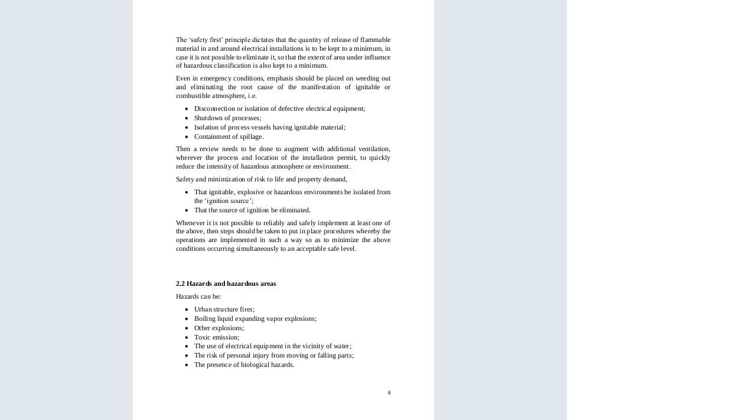So the notes are going on. I want us to go direct to the basic area classification. So how do I know that this is a hazardous area? How do I classify them? The area classifications cannot be set rigidly into any standard.

So each installation will be different in some respect, and therefore each site must be examined on its individual merits. There are three situations that can occur in an operating plant with reference to hazardous areas. Number one, a situation where an explosive atmosphere is present always or for long periods because of operational requirements, i.e. they are continuous. It can experience an explosion at any time, it's normally there.

Humphrey, are we together? Can you give me an example of an area that can easily be explosive, that maybe its operations always have a possibility of explosion?

Okay, areas like Mandera, Garissa. Why? Because of the Al-Shabaab attacks. No, we are not talking of the explosion from Al-Shabaab, we are talking about fire. We are doing hazardous areas.

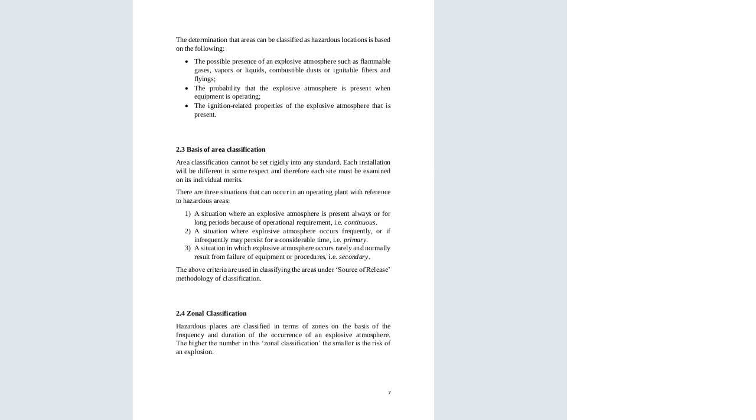So for hazardous classification, the above criteria is used to classify the areas under the source of release, that is the methodology of classification. For zonal classification, hazardous places are classified in terms of zones on the basis of the frequency and duration of the occurrence of an explosive atmosphere. So the higher the number of the zonal classification, the smaller the risk of an explosion. Let me take you to the next slide.

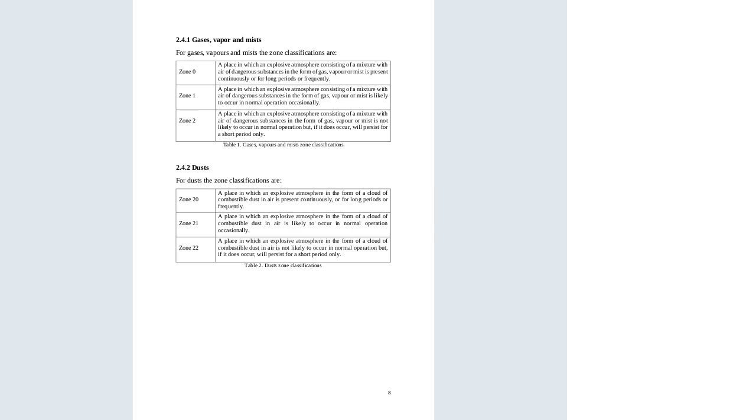Zone 22 is a place in which an explosive atmosphere in the form of cloud, combustible dust in air is not likely to occur in normal operation, but if it does occur, it will persist for a short period only.

Design philosophy of equipment and installation - I'll skip that since those are notes you'll read yourselves.

So, equipment definitions - the term equipment as defined refers to equipment we are going to use in installation in hazardous areas. We have special equipment used for installation in these areas; you cannot just do a normal installation there. That is why it's called special installation.

The equipment is normally classified by, number 1, the maximum spark energy it can produce, and number 2, the maximum surface temperature. For equipment to be considered safe for use on a plant, its classification category must be the same or better than that required by the plant. The statement of categories required on a plant, by its owner or user, provides any potential supplier or contractor with a clear understanding of the limits it must meet. So before any installation, you must know what kind of equipment you're using - if it can produce a spark, what is the maximum sparking it can produce, and how it will behave.

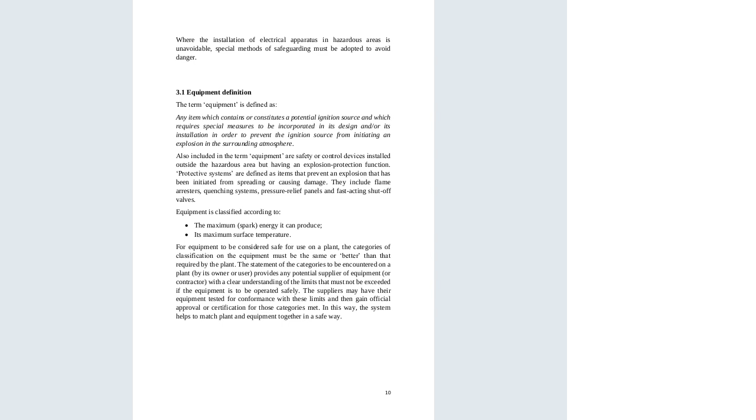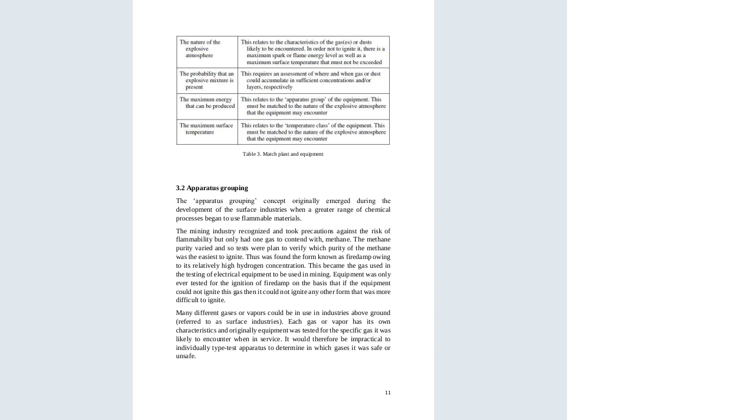So, the nature of explosiveness - you can see that table, you'll look at it later, I'll give you the notes. Apparatus grouping is also there.

Then the surface temperature classification. Ignition temperature, i.e. the temperature at which ignition could occur, for example due to a hot surface of the apparatus, is dependent on the type of gases or vapor present. This ignition temperature is influenced by several factors and is thus dependent on the stipulated testing.

The maximum temperature of an exposed surface of an electrical apparatus must always be lower than the ignition temperature. That is why, before doing any installation in these special areas, you have to test the ignition temperature. You must know the maximum ignition temperature present in the dust, gas, or vapor in that area, and ensure the electrical apparatus used has a temperature lower than that ignition temperature.

For example, maybe you're using a tester to check continuity of a circuit, and the tester has been removed from a hot environment. The temperature of that tester could ignite the environment, maybe the gas present. So you have to be very careful and test, which is why we are told to take a lot of precaution when doing testing.

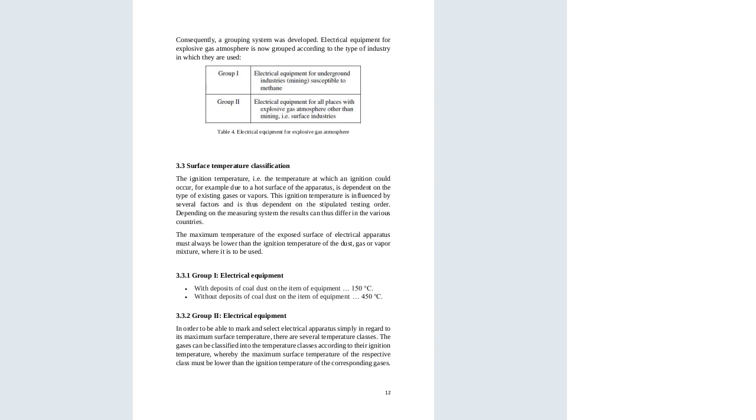Now we proceed to group 2. We said group 1 equipment are equipment with deposits of coal dust on the item, equipment that is below that degree rating. Now without deposit of coal it has to have that degree rating. So you will read those. I want to take you to something, I want to give you something.

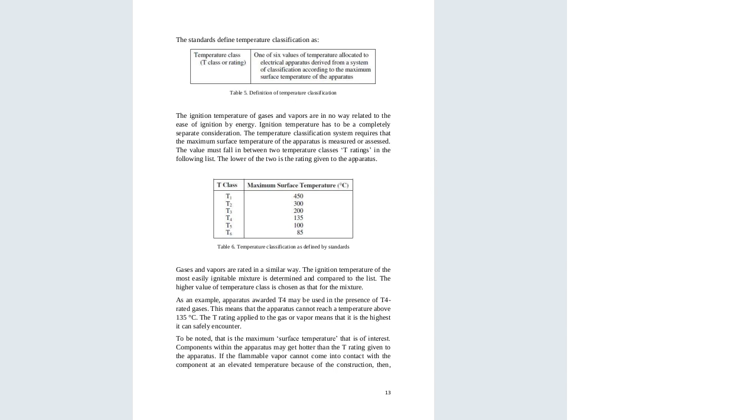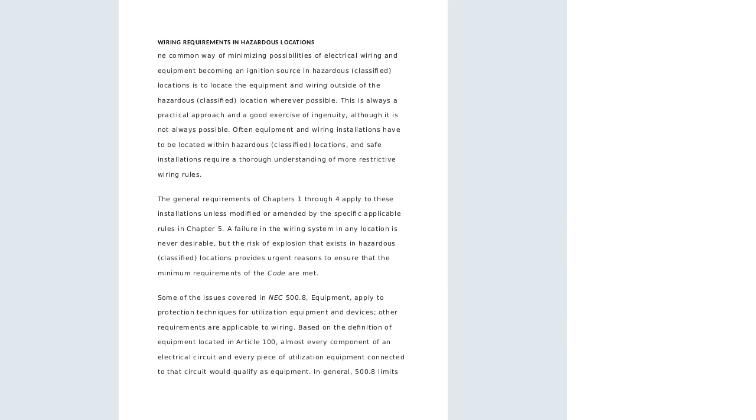Now, wiring requirements in hazardous locations. After being able to identify the classes or areas, we have been able to classify them, so we are going to look at the wiring requirements.

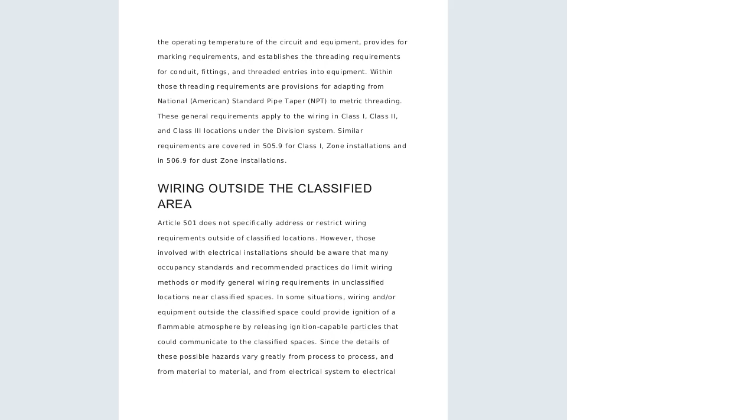Zone 1, Zone 2, that is class 1, class 2, class 3. We said zones can be classified as classes. We can have class 1, which is zone 0, class 2, and wiring outside the classified areas.

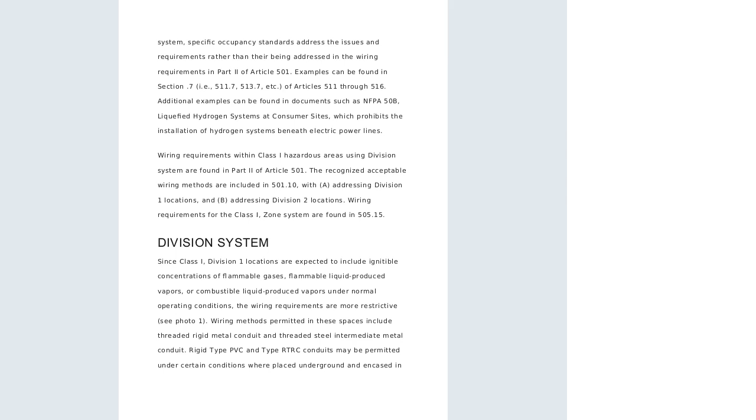Don't know why my notes are not coming. Okay. Division system. I'll give you those notes, I'm looking for something so that I can explain.

Methods for classification, divisions, and locations. So rigid metal conduit, intermediate metal conduit. Wiring methods permitted for Class 1, Division 1 locations are identified in the section covered earlier, and include threaded rigid metal conduit. We normally have types of materials, types of conduit that can be used to install for Class 1. For Class 1, we use rigid metal conduit and intermediate metal conduit.

When we say rigid metal conduit, these are metals that are very heavy, and they are fireproof, because inside the inner diameter surface of the metal we normally have some dust powder that cannot burn, that is resistant to explosions. So when coated with that dust, they cannot ignite or explode. That is why, when doing installations in zone class 1, or zone 0, you use this type of metal, because they are very heavy metals that cannot explode.

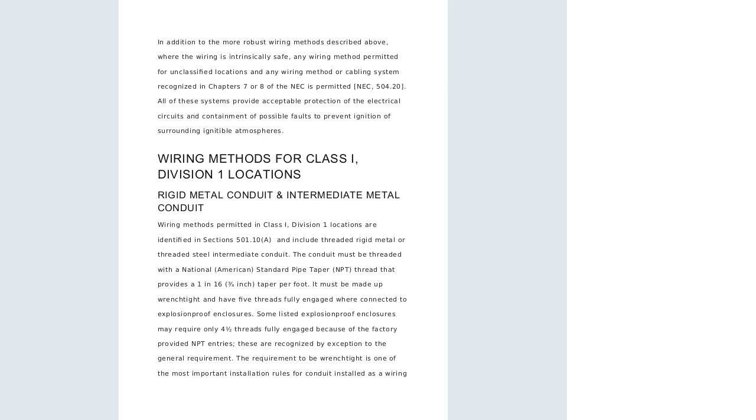So those are the types of metal we have discussed. You can see the way this metal is - that is the explosion-proof equipment. Are you seeing the type of metal used there?

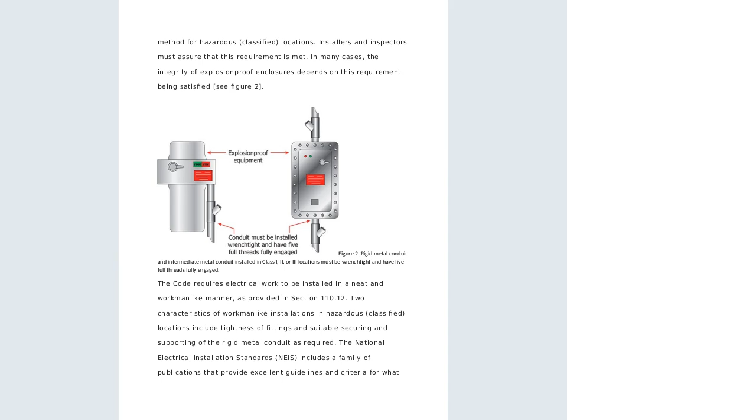The conduit itself must be installed wrench tight and have 5 full threads fully engaged. This type of metal is called rigid metal conduit and intermediate metal conduit, used to install these classes. You can see the pictures and the kind of metals used. Even if fire breaks out, it cannot explode to the environment, or even if the substance carried in these pipes is very explosive, it cannot explode, so they save this electrical installation. You can even see the isolator there and how the metals are being installed.

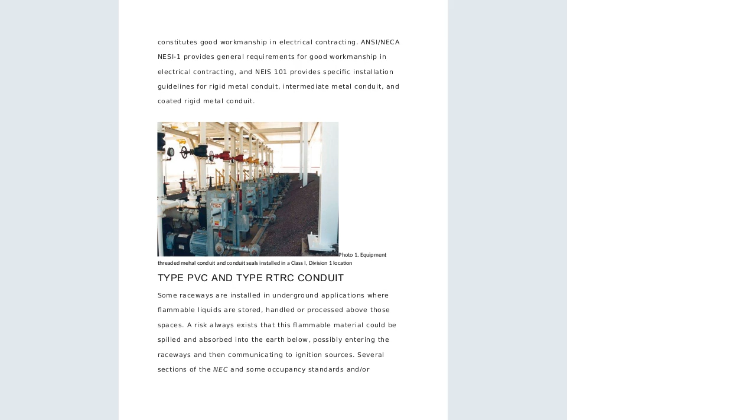So all the motors, the machines here are very inflammable, very explosive, but the connection that has been done here - you can see the motors, you can see the pipes used to install the motors. You cannot see any exposed wire, any exposed cable to the motor. So this is now the class 1 division, or the class 0.

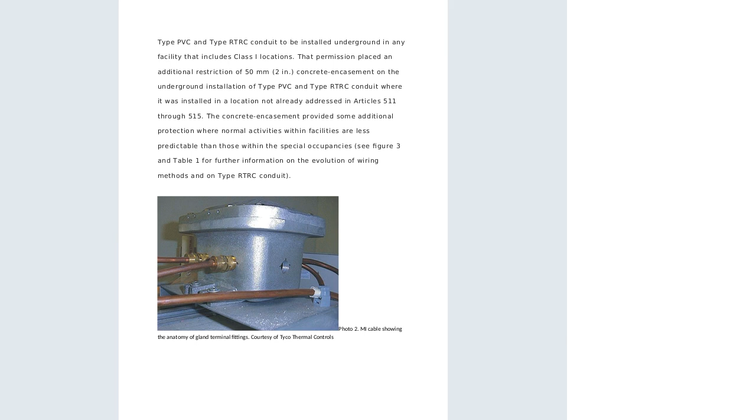Now look at that. Now we have the mineral insulated cable, Type MI. The type MI cable is a fairly unique wiring method. It is a factory assembly of one or more conductors insulated with a highly compressed refractory mineral insulation, enclosed in a liquid tight and gas tight continuous copper or alloy steel sheath.

This type of cable is permitted to be used in class 1 locations where the termination fittings are listed for this location. So they are called mineral insulated - these are pipes, metallic pipes that are coated. They're just normal pipes, but coated with minerals. So these minerals appear like insulators that cannot allow fire or explosions to take place.

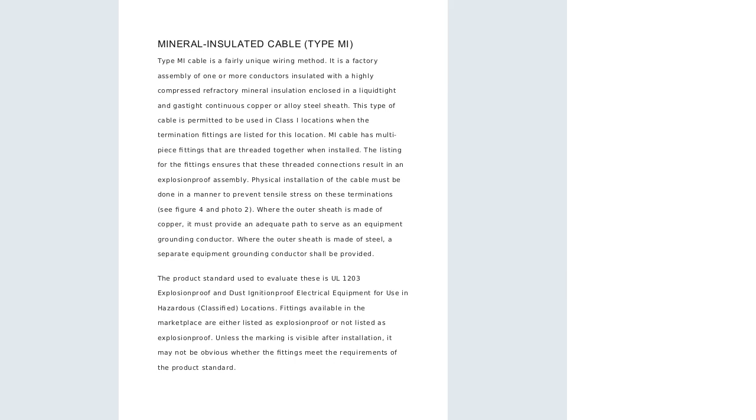Now we have another one called the metal clad cable, type MCHL. So in your examinations, you can be told to name some of the materials that can be used in hazardous areas - these are the materials you name. For example, we talked about the MI, we've also talked about the metal clad, and so many others we'll talk about. You have to know these materials very well and know where they can be used.

For example, this type of cable is permitted in cable tray. We can install this in cable tray, in direct sunlight, or in direct burial or concrete encasement. So the installation of MCHL, the metal clad cable, is limited by code to industrial establishments.

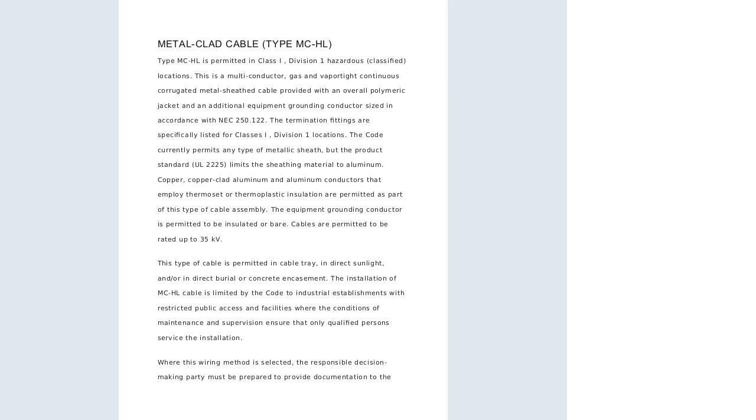Now look at the way it is installed. Look at the way that cable, that coating is. So this MC-HL cable is suitable for classes 1 and 2 division. Now it has even gone to class 2 division, and class 1 location in industrial establishments with restricted public access, courtesy of the manufacturer, called Thomas and Betts. So you can see how it is.

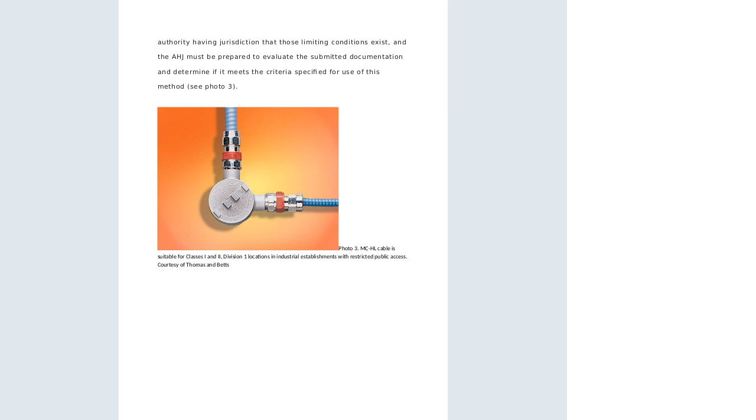Some notes about hazard areas - those are areas where dangerous things are taking place.

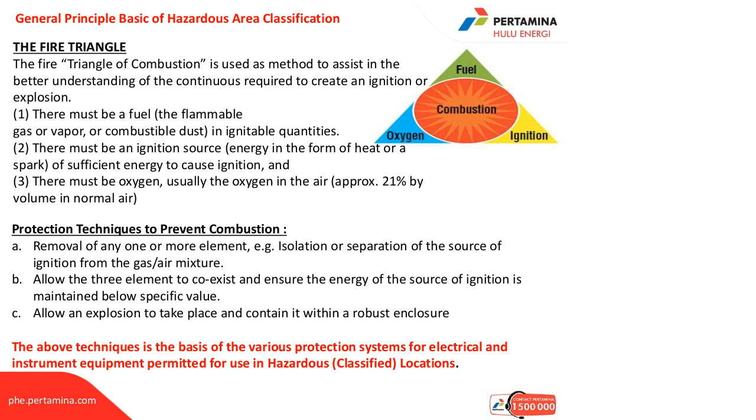They can exist all three of them at the same time, but they keep distance. You keep distance, you put a barrier between what can cause a spark and the fuel and the air. Or you allow the explosion to take place and contain it within a robust enclosure.

So classifications of hazardous areas, we have already said this. We have an area in which an explosive gas atmosphere is expected, and non-hazardous areas, these are areas in which an explosion gas atmosphere is not expected at all times.

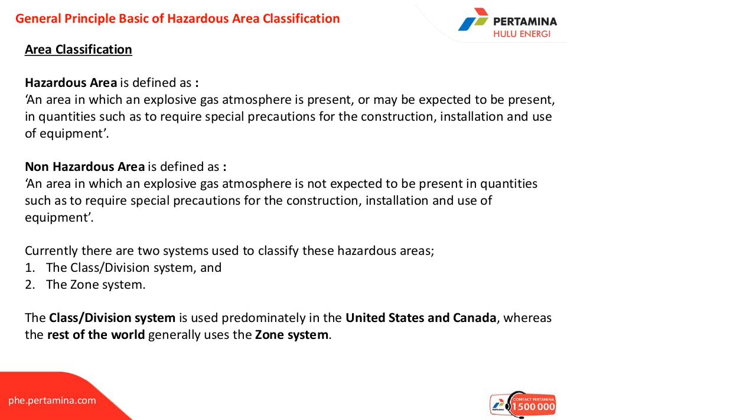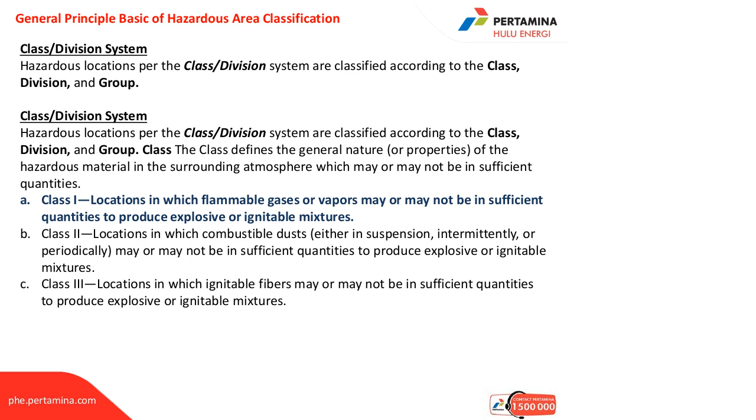So we have classification divisions or zone system. We have already talked about that. The standards, that one is not important for us. The divisions we had already talked about, class 1, class 2, can be a class or division depending on what.

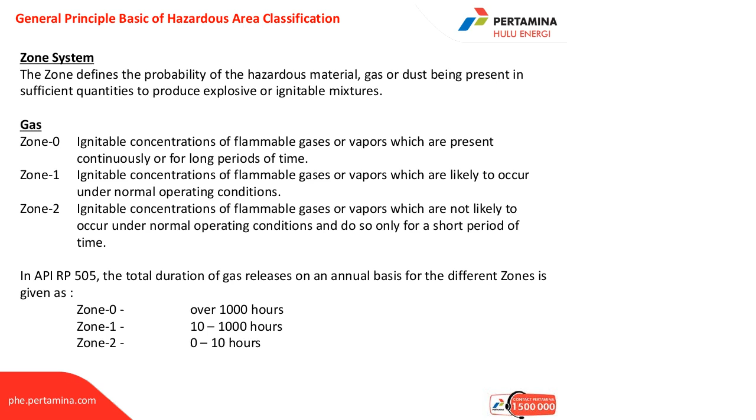So there are the zones there. We talked about the gaseous zone, the ignitable ones, we had already talked about them. Divisions, areas, now different zone divisions. We can have division 1, which is zone 1, division 2, which is zone 2, and then non-hazardous is there.

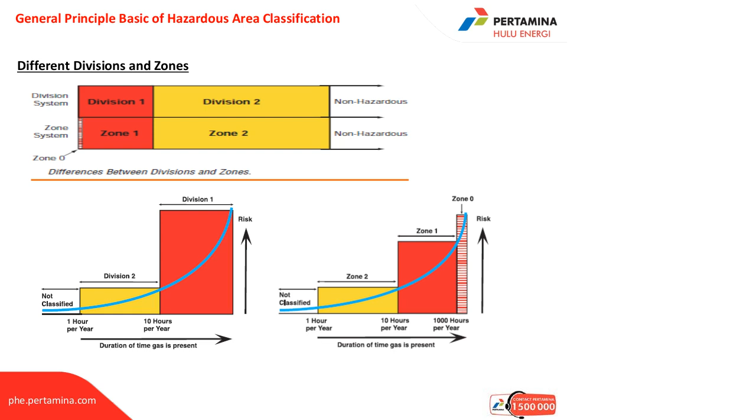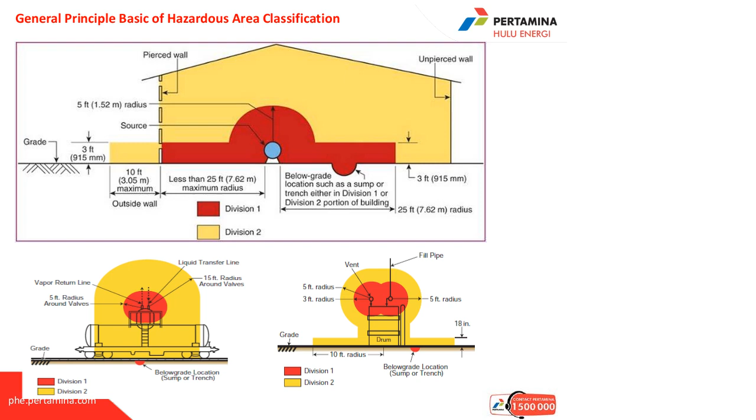General principles basic on the hazardous area classification. Now, when we have a place like this, we want to classify the zones and where are the places that are more dangerous. For example, the one colored in red is division 1, and division 1 is the most dangerous area, and then division 2 is the yellow, meaning it's not as explosive as division 1.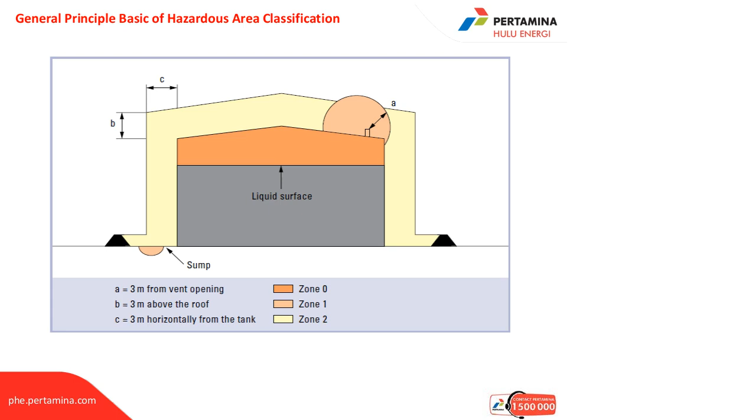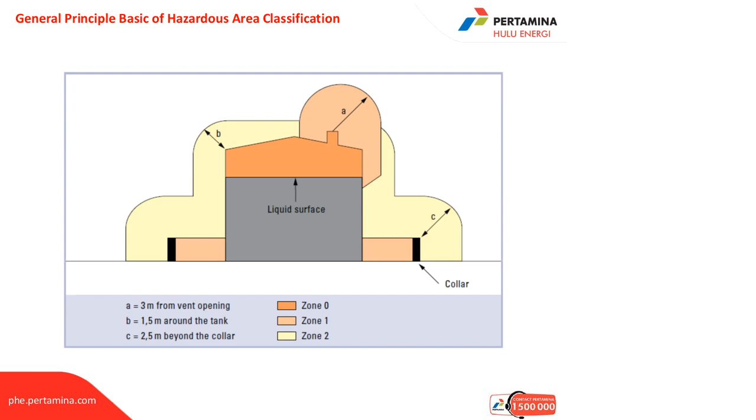We go now to the hazardous area classification still, the liquid surfaces and the zones. They're classified using the colors, you can look at the colors. That is still the same, still under classification.

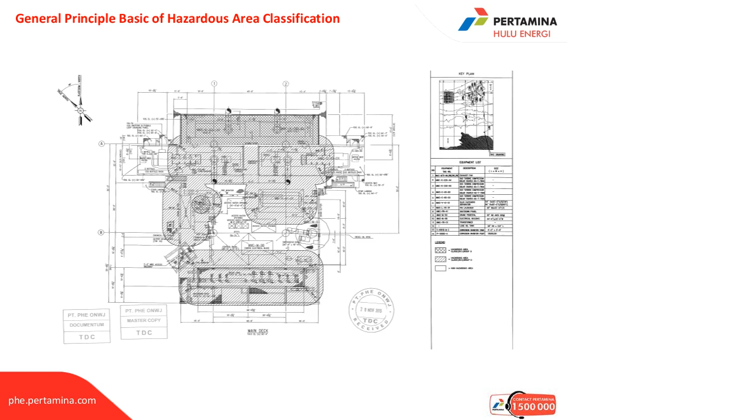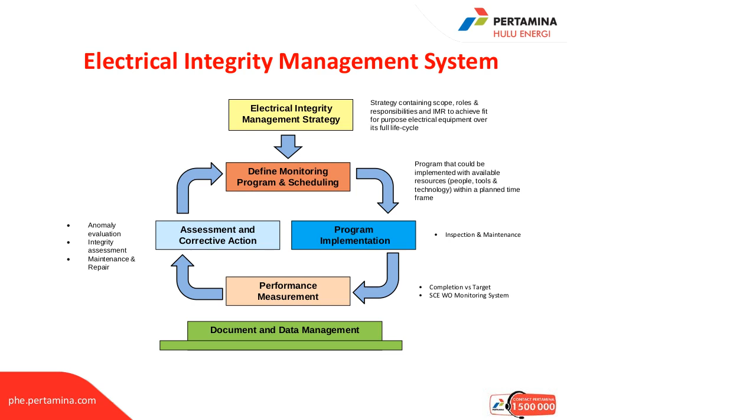Now, system. We need to know how to manage our system so that it cannot be explosive or cause danger. So we have the electrical integrity. This is for management to prevent fires from breaking out. So we have to do this monitoring each and every time, and scheduling. We monitor and say if this place is supposed to be maintained at this time, we need to maintain it so that we keep off fire breakouts from our installations.

Implementation of that, I want us to go now directly to the installation.

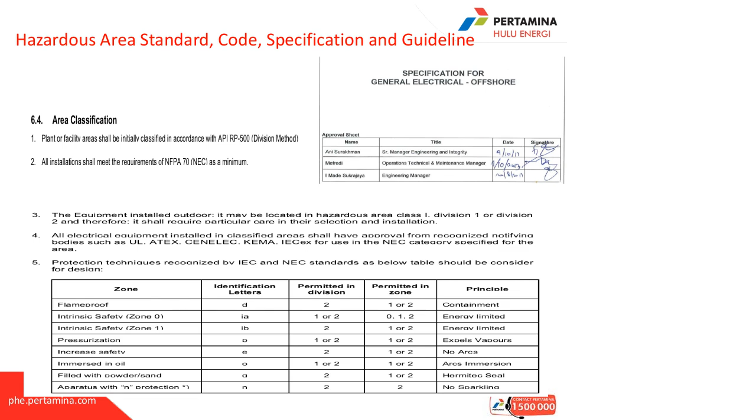I'll give you those notes, so I want to go straight to something so that I explain.

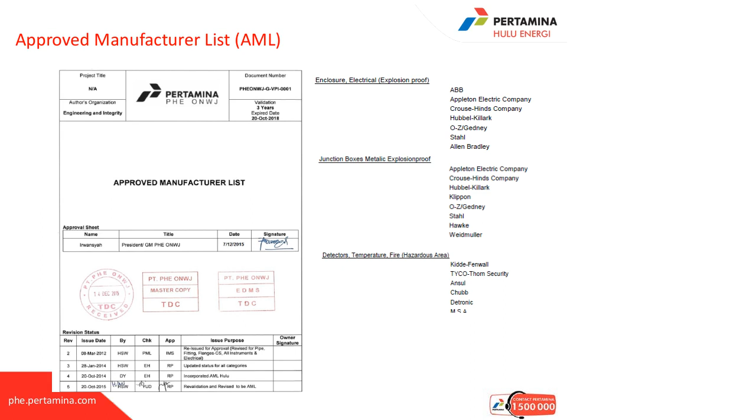Now, preparation of hazardous source list. Types of hazardous area classification, that one we have talked about, and the map.

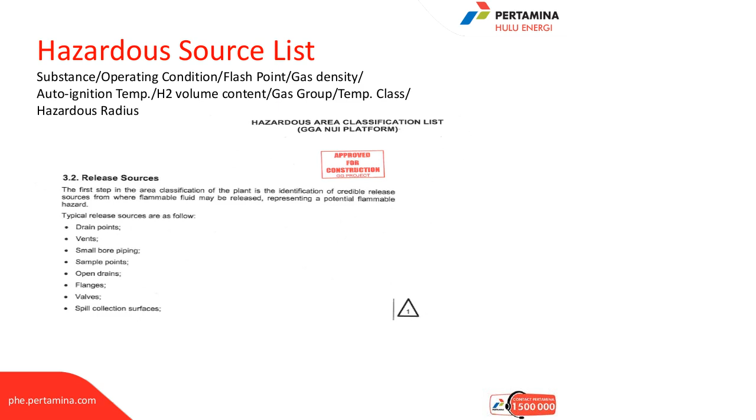This slide is not moving very fast, but I'm getting something.

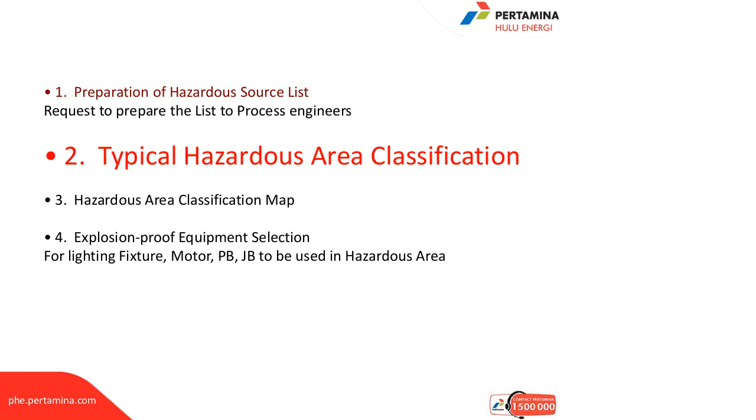Now, typical hazardous area classification. You can see this. You can even be told in an examination to use a diagram or illustration to describe or differentiate between hazardous areas and non-hazardous areas. You can see the way this person has manually done it. Now the gas lighter than air, adequately ventilated compressor shelter. So the person is just trying to explain using typical and simple drawings to show the differentiation between an area that is hazardous and another one that is not that hazardous.

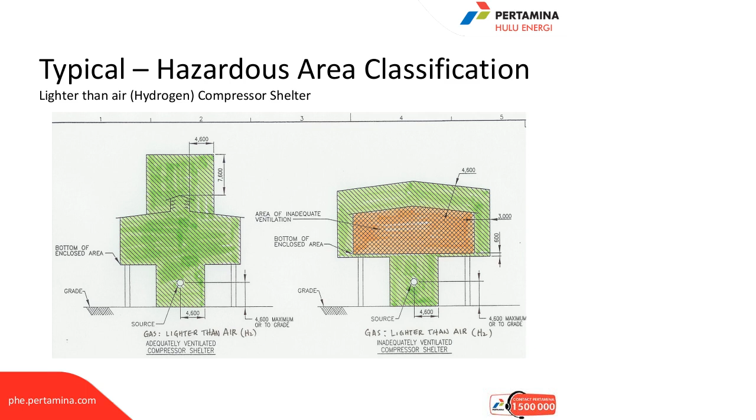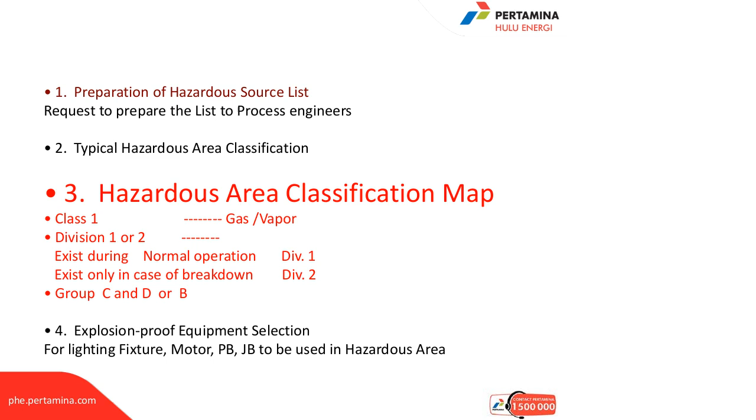Class 1, we said it is gas and vapor, that which is the class 1 and 2 division that exists during normal operation. This one we have always said.

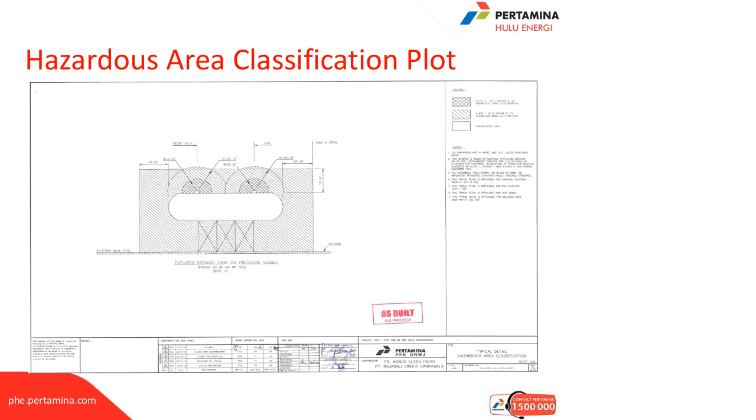Now, I wanted us to reach at the installation part. Yes, we are now. Installation. The cable glands are used when terminating the cable into electrical equipment.

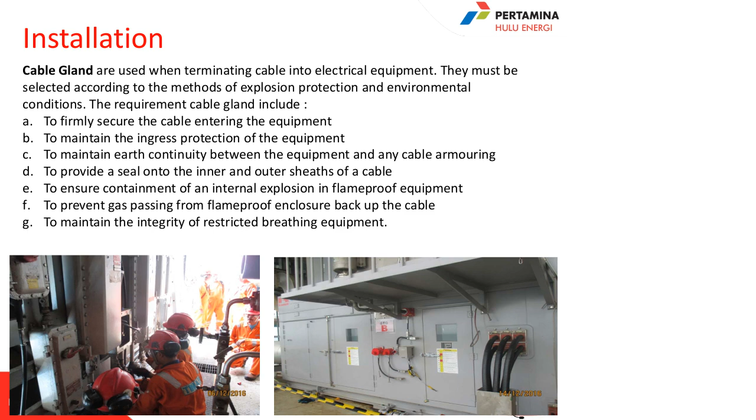They must be selected according to the method of explosion protection and environmental conditions. The requirements for cable glands include: to firmly secure the cable entering the equipment, to maintain the ingress protection of the equipment, to maintain earth continuity between the equipment and cable armoring, to provide a seal onto the inner and outer sheaths of the cable, to ensure containment of internal explosion in flameproof equipment, to prevent gas passing from the flameproof enclosure back up the cable, and to maintain integrity in restricted breathing equipment.

You can see those guys working on the equipment.

Now, the selection of the cables. This is how we select the cables. You can see even the classifications, the layers of protection that are there. You can see how many layers we have, like from D to B to F. You can see all those distances, the armoring that is there.

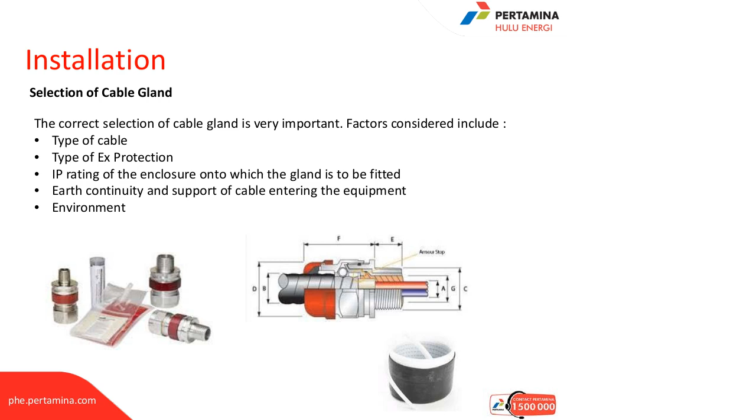The correct selection of the cable gland is very important. Factors considered include: the type of cable, the type of explosion protection, the IP rating of the enclosure into which the gland is fitted, earth continuity and support of cable entering the equipment, and the environment.

The installation now is there. These are the ratings that are put there to show the type of cable.

The light rigid conduit installation class 1 division. You can see that - the lighting rigid conduit. Now you can see how to do an installation of the lighting system in such dangerous areas. You can see the pipes, the conduits that are there. You can see that.

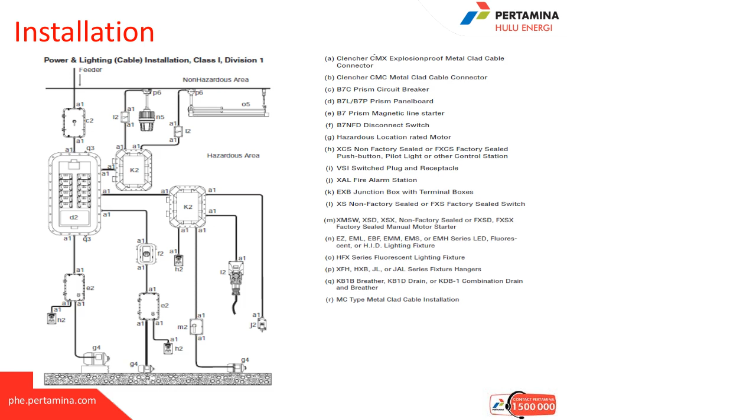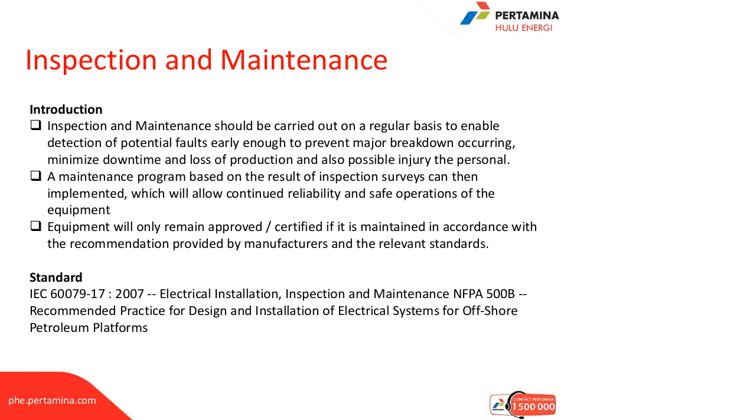Now, a maintenance program based on the result of the inspection survey can then be implemented, and then the equipment will only remain approved, certified, and maintained according to the recommended way. So inspection and maintenance is still there.

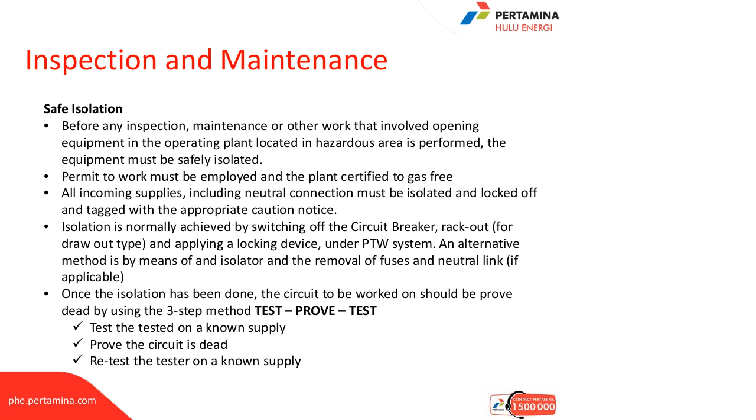We have the safe isolation. Before any inspection, maintenance, or other work that involves opening equipment in the operating plant located in a hazardous area, a permit to work must be employed and the plant certified gas-free. Then you will read all those notes under safe isolation.

Qualification of personnel - who is the person who can do this work? The person involved in the inspection and maintenance shall possess, to the extent necessary to perform their task, the following: an understanding of the general principles of explosion protection, and an understanding of the general principles of various explosion protection methods.

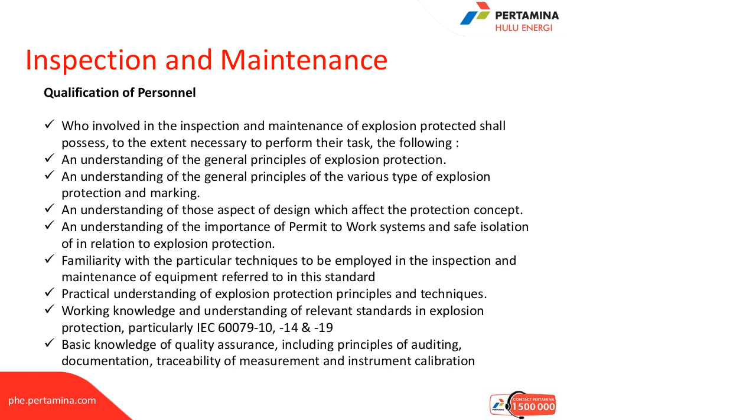So these are the qualities of somebody who can do the inspection and maintenance - that is the personnel. Now, if you are employed in a company and told that you are going to do the maintenance of the electrical installation in the industry, you have to have all the qualities listed here for you to be able to perform. You need to have the knowledge and the skill at the same time.

So I think we are done.

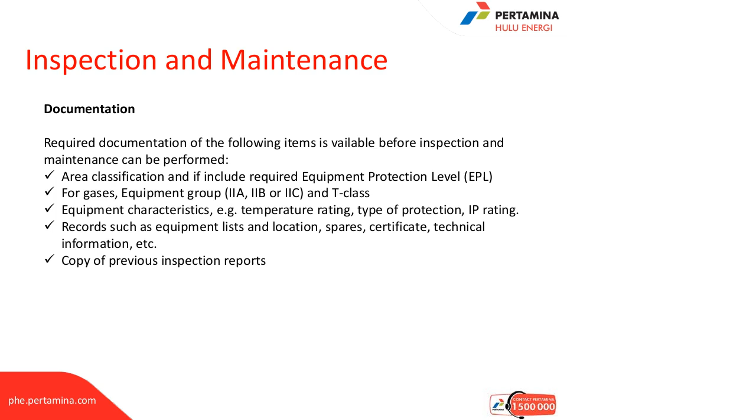Okay, today's presentation will end there, and I would like to hear your views.